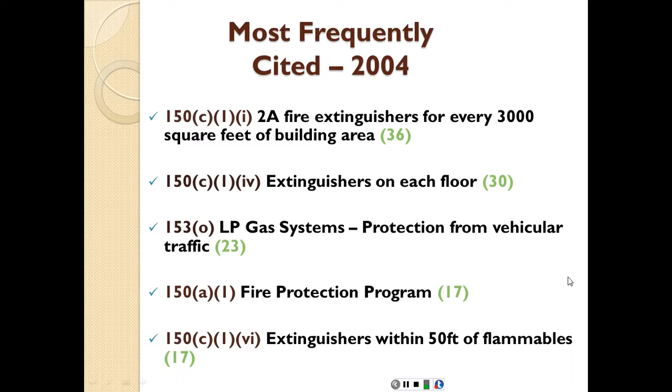Let's first of all identify a few things. The first definition is about what is flammable. Flammable is any material capable of being easily ignited, burning intensely, or having a rapid rate of flame spread. Flammable liquids are liquids having a flash point, which is the point of ignition, below 140 degrees Fahrenheit and a vapor pressure not exceeding 40 pounds per square inch. So these are the flammable liquids.

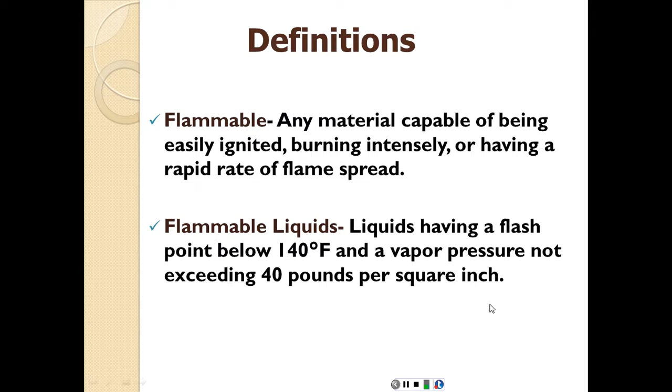Another definition is a safety can, because we're going to talk about storage in safety cans. So what's a safety can? It's an approved closed container of not more than 5-gallon capacity, having a flash arresting screen, spring closing lid, and spout cover designed so it will safely relieve internal pressure when exposed to fire. Because if the pressure keeps building inside, it's going to explode.

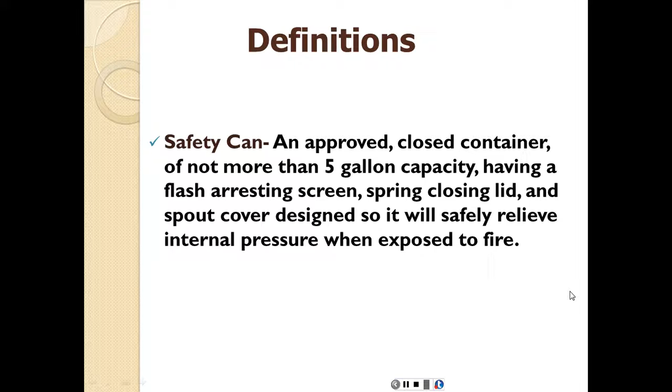These are samples of these safety cans. As you can see, it's labeled as a safety can, and the liquid inside is a flammable liquid. This one here is a regular gas, and so on. So they are going to be labeled on the outside as well. That's another example of a safety can.

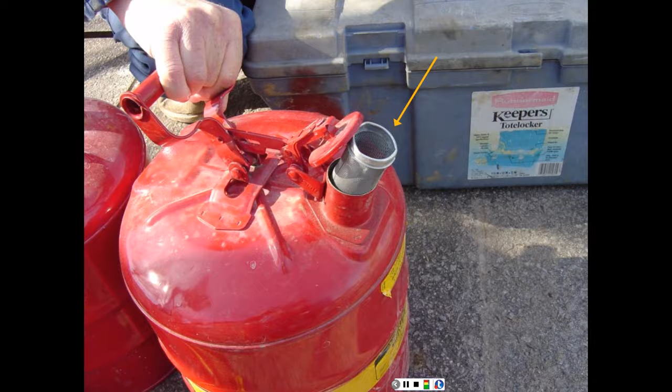General requirements when it comes to fire protection: the employer must develop a fire protection program to be followed through construction and provide all equipment as required for firefighting. We're going to talk about the different kinds of equipment that are going to be used in case of building under construction or a permanent construction or whatever.

Water supply, a temporary, of course, as we know, the easiest way to put out fires is using water. So a temporary or permanent water supply of sufficient volume, duration, and pressure must be made available as soon as combustible materials accumulate. Where underground water mains are to be provided, they must be installed and available as soon as

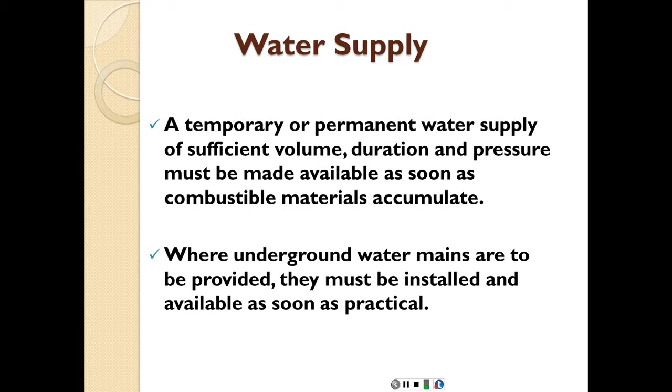Water supply standpipes: in all structures where standpipes are required, they must be maintained as construction progresses in such a manner that they are always ready for fire protection use. So these are going to be dedicated for fire protection. Standpipes must be provided with a Siamese fire department connection on the outside of the structure at the street level and conspicuously marked.

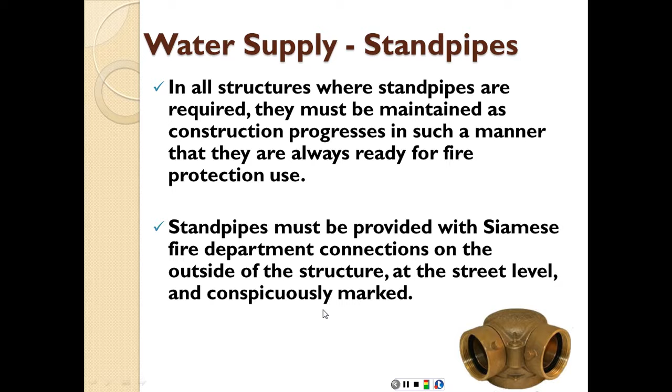Fire cutoffs. Now, in case of a fire, we want to limit the spread of that fire basically until we get some external support or someone calls the fire department and things like that. So when talking about walls and doors that are going to contain that fire, fire walls and exit stairways must be given construction priority. So you're going to have fire rated drywall, for example, or fire rated masonry walls or block walls, things like that.

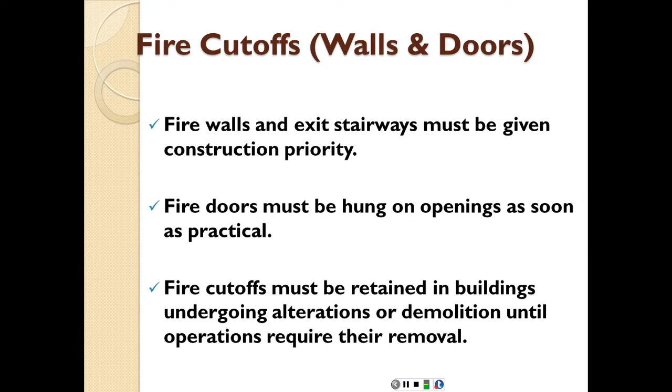Fire doors must be hung on openings as soon as practical, again, to isolate that fire and keep it contained within that room. Fire cutoffs must be retained in buildings undergoing alterations or demolition until operations require their removal. These include things like sprinklers, for example. If you're going to demolish a building or you're going to alter the internal use of the building, you should keep the sprinklers until the last possible moment so that in case a fire erupts, at least you're going to have the means to put it off.

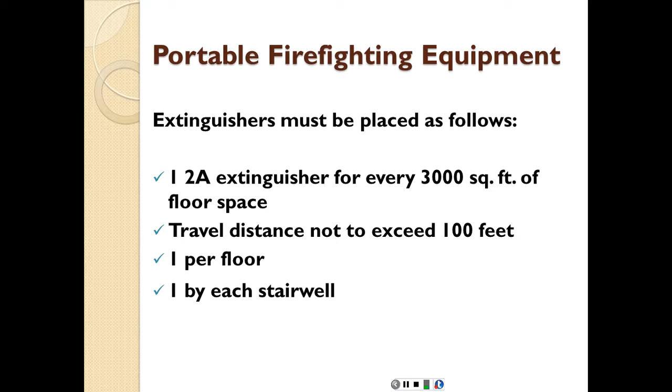Portable firefighting equipment are usually extinguishers, which must be placed as follows: 1 2A extinguisher for every 3,000 square feet of floor space. Travel distance not to exceed 100 feet, so that anyone trying to reach that fire extinguisher from any point on the floor won't travel more than 100 feet. At least one per floor and one by each stairwell. So these are the requirements for the portable extinguishers.

The alternative to a 2A extinguisher is a 55-gallon drum of water with 2 fire pails. Or a half-inch garden hose not longer than 100 feet, because otherwise it can get tangled and get knots, with a nozzle capable of discharging 5 gallons per minute, allowing for a quick discharge of water. The hoses must be located on racks or reels, again to prevent puncture to the hoses, disconnection, or tangling and knotting.

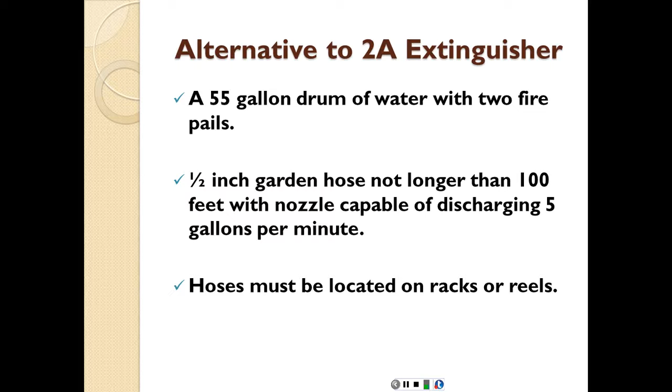Another portable firefighting equipment would be a 10B extinguisher, which must be within 50 feet of 5 gallons of flammable liquid or gas. We're going to talk about the A and the B classifications in just a couple of minutes. So a 10B extinguisher, suitable for flammable liquids or gases, has to be placed within 50 feet of any 5-gallon containers.

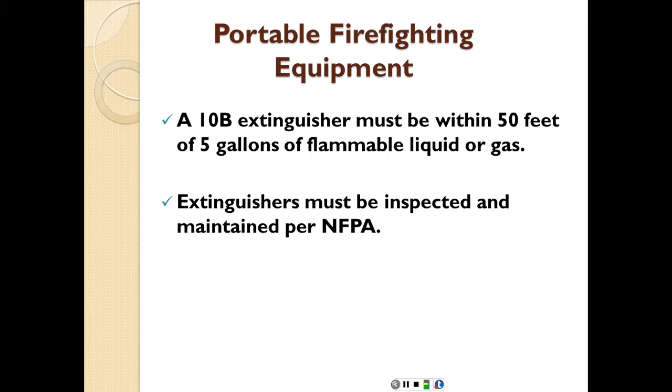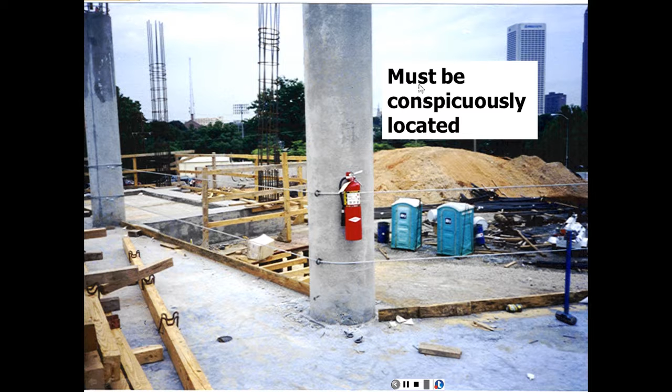It must be conspicuously located, so again you can clearly see it on site, and easily accessible on any floor, as we mentioned before.

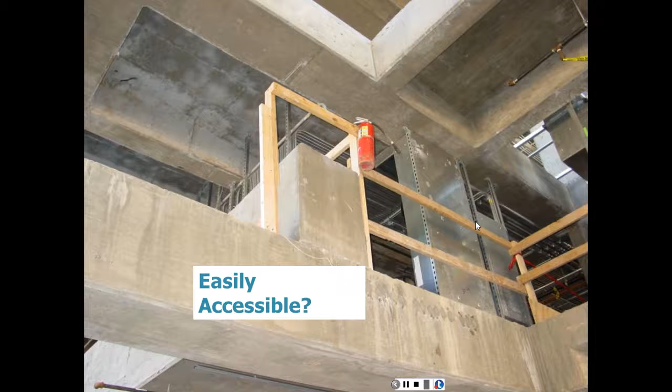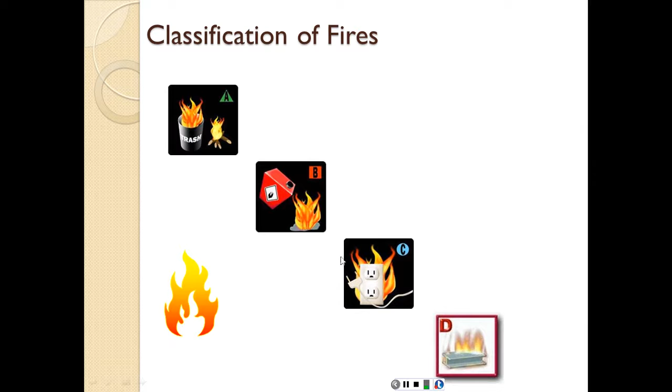Now to talk about the different types of fire, we have 4 different categories or groups: A, B, C, and D. The higher the letter, the more serious and hotter the fire. So type A is lower than B, B is lower than C, C is lower than D, D is the highest. Classification A is for wood, paper, or trash, which is most common but can be easily extinguished. Its burning temperature is not that high.

B is for flammable liquids. That's why we mentioned having it near the 5-gallon containers, within less than 50 feet. C is electrical equipment, burning at a higher temperature. D is combustible metals, which has the highest temperature, lasts the longest, and is the hardest to extinguish.

As you can notice, each one of them, in addition to the letter, has a certain symbol. The A is in a triangle, the B is in a square, the C is in a circle, and the D is in a star.

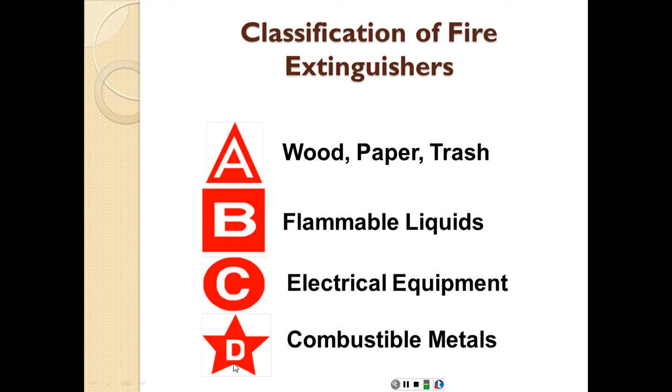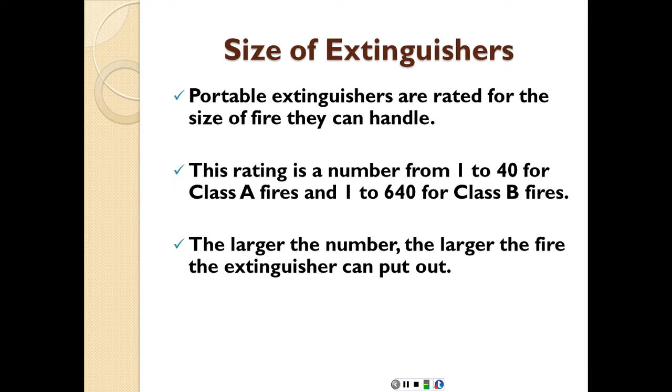The sizing of the extinguishers: portable extinguishers are rated for the size of fire they can handle. This rating is a number from 1 to 40 for Class A fires and 1 to 640 for Class B fires. The larger the number, the larger the fire the extinguisher can put out, so the higher, the stronger that extinguisher.

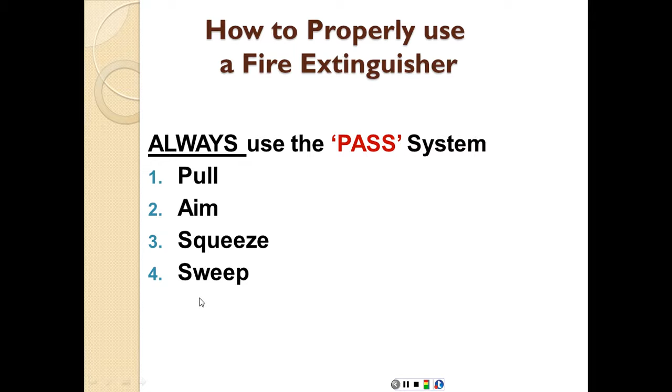How to properly use a fire extinguisher? Always use the PASS system. Remember PASS: P is pull, A is aim, S is squeeze, and S is sweep across the base of the fire to extinguish it.

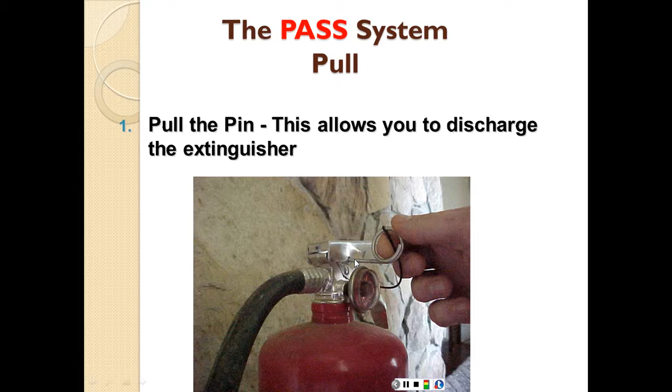The first step is to pull the pin. This allows you to discharge the extinguisher. That pin is a safety measure just so that it wouldn't discharge by accident.

Aim the extinguisher at the base of the fire. Aiming at the flames will not put out the fire, but the base of the fire is where the ignition is.

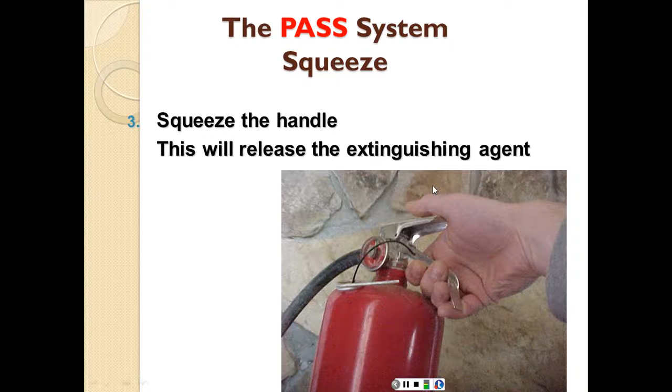Squeeze the handle. This will release the extinguishing agent, whether it's powder, foam, or water. And sweep from side to side with the extinguishing agent until the fire is out, covering across the base of that fire.

During demolition or alteration, sprinklers must be retained in service as long as reasonable. New construction utilizing automatic sprinklers must follow the work and be placed in service as soon as practical. So they're basically the last out, the first in. Once you are dismantling, altering, or demolishing, they stay for as long as possible, and when you are building anew, then they're installed as soon as possible.

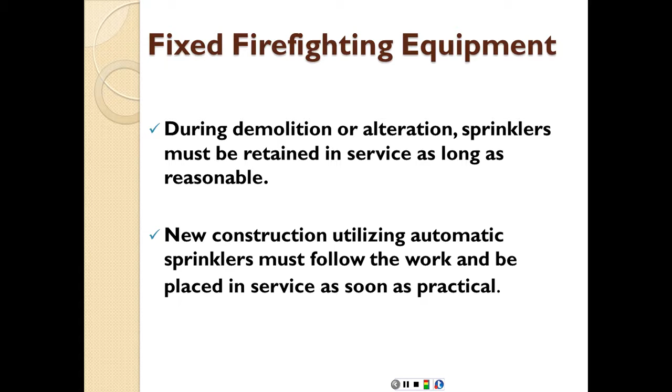Alarm devices: an alarm system must be established by the employer that alerts employees and the fire department. The alarm system can be phone, siren, radio, air horns, etc. It must be posted at phones and job entrances so people would know where that alarm system is, so that they can notify everyone as soon as the fire erupts.

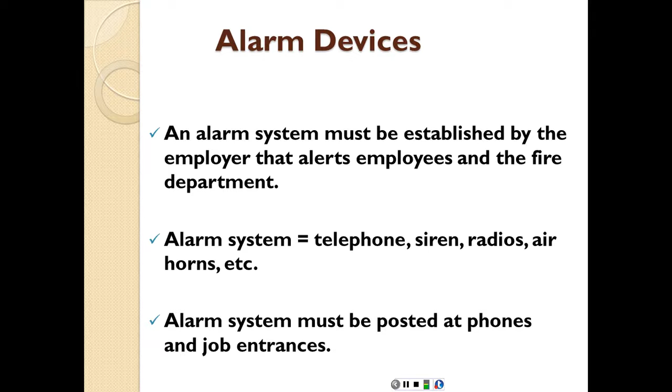Electrical wiring and equipment: when we talked about electrical work, we mentioned that fire is going to be one of the major hazards. So electrical wiring and equipment for light, heat, and power must be installed per Subpart K, which is electrical. Gas-powered equipment must point exhaust away from combustible material so that the heat from that exhaust might not cause ignition to that material. Smoking must be prohibited in work areas which may pose a fire hazard.

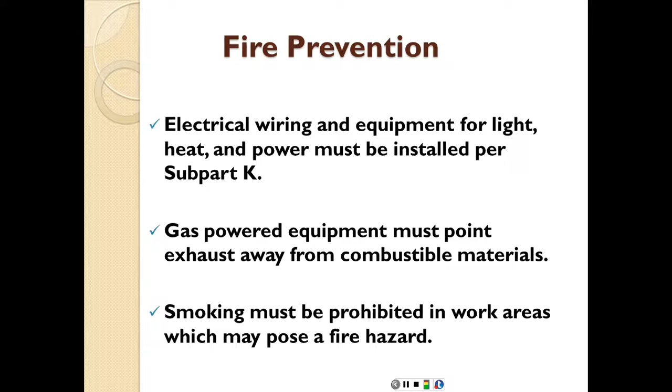No temporary building may be erected where it would block or hinder an exit, because in case of a fire, you want to have a safe exit for those who are inside the building. Temporary buildings must be erected at least 10 feet from other structures, again to allow for enough space for people to get out of the building in case of panic.

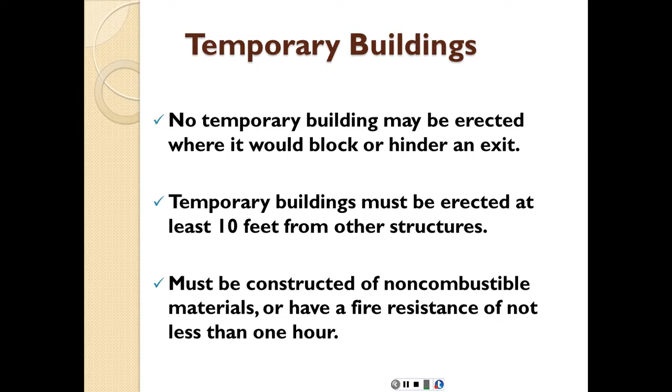It must be constructed of non-combustible materials or have a fire resistance of not less than 1 hour. So it can resist - in case it gets on fire - before collapsing, it's going to resist the spread of that fire for at least an hour.

In case of open yard storage, combustibles must not be stacked more than 20 feet high. So if you have any combustible material that you're going to stack on site in open yard storage, not higher than 20 feet. Storage area must be kept clear of weeds, trash, or any other combustibles that can ignite or help with the ignition, so you want to avoid that.

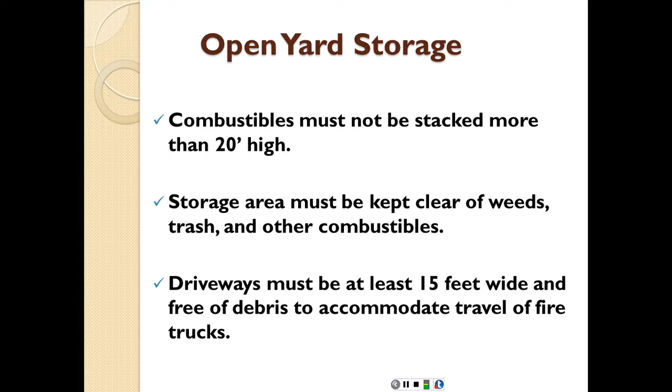Driveways must be at least 15 feet wide and free of debris to accommodate travel of fire trucks, because fire trucks are much wider than regular vehicles, so you want to allow for at least 15 feet wide access.

Entire storage site must be kept free of accumulation of unnecessary combustible materials to try to limit the occurrence of fire as much as possible.

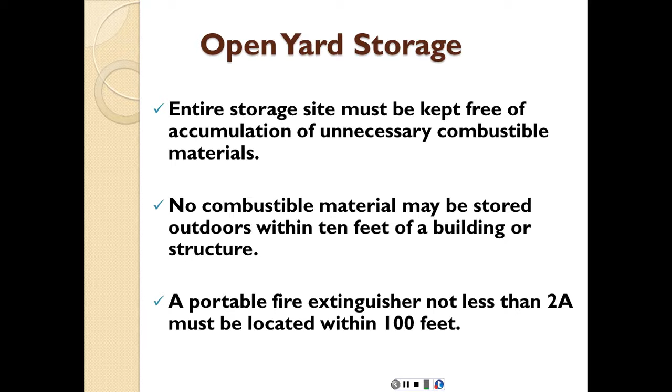No combustible material may be stored outdoors within 10 feet of a building or structure, because in case people are trying to get out of the building, they do not need to be exposed to an additional hazard of fire facing them. A portable fire extinguisher not less than 2A must be located within 100 feet. So that's in case of open yard storage.

For indoor storage, all materials must be stored, handled, and piled with due regard to their fire characteristics. Incompatible materials which may create a fire hazard must be segregated by a barrier with a fire resistance of at least 1 hour. So the minimum fire resistance in this case to enclose the fire is going to be at least 1 hour.

Clearance of at least 36 inches must be maintained between stored materials and sprinkler deflectors, again to allow for the sprinklers to work properly and to spread to the required area.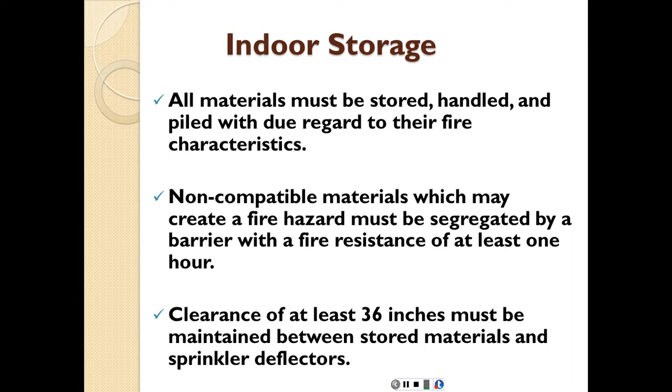Maintain clearance around lights and heating units to prevent ignition of combustibles. So do not store the combustible material too close to a source of heat or a source of fire where it can cause that ignition.

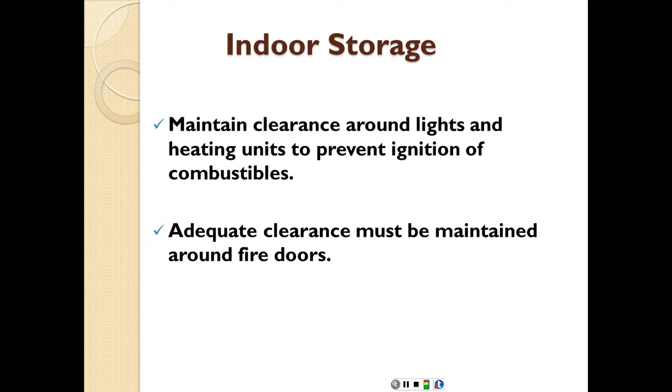Adequate clearance must be maintained around fire doors, again because the fire doors are going to be used to enclose the fire. In case someone is inside, they need to get out, so you need to have easy and free access in and out of that room.

For flammable and combustible liquids, only approved containers and tanks, which are portable tanks that we're talking about, are to be used. It cannot be stored at exits, stairs, or passageways, because that defeats the purpose of an exit point in case of a fire. These by themselves are a big fire hazard, so you want to eliminate them or keep them away from the exits and the doors and the stairs.

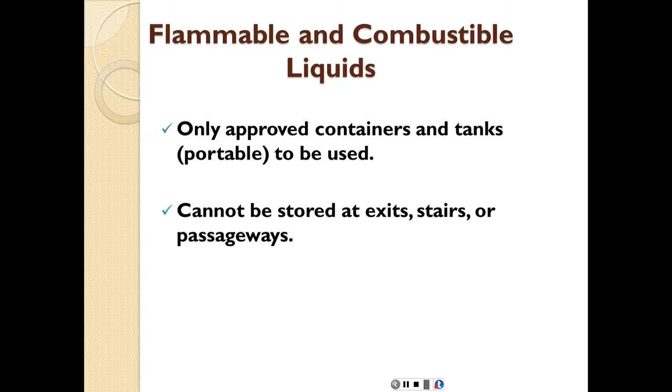For the storage of these flammable and combustible liquids, no more than 25 gallons of flammable or combustible liquids may be stored in a room outside of an approved storage cabinet. So you can have more than 25 gallons, but inside the storage cabinet.

No more than 60 gallons of flammable or 120 gallons of combustible liquids can be stored in any one storage cabinet. So even if you're going to have a storage cabinet to contain this combustible or flammable material, it should not contain more than 60 gallons of flammable or 120 of combustible.

Now, which one is easier to ignite, the flammable or the combustible? Obviously the flammable. That's why we have a lower limit.

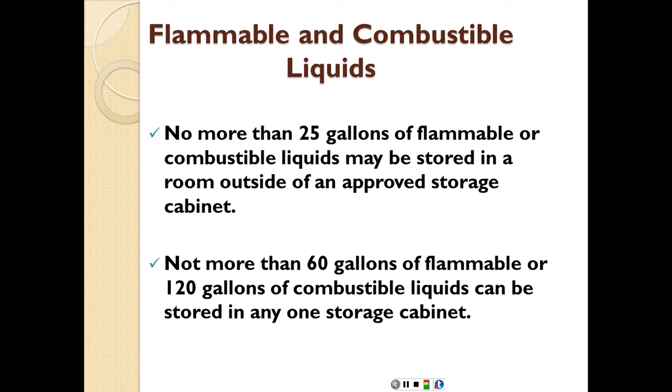No more than 1100 gallons may be stored in any one pile or area of combustible or flammable liquids. Piles must be separated by 5-foot clearance, again to allow for access between these piles to prevent the spread of that fire. Piles must not be closer than 20 feet to any building, again to allow for ease of a safety zone or access zone between the building and the storage area for these flammable and combustible liquids.

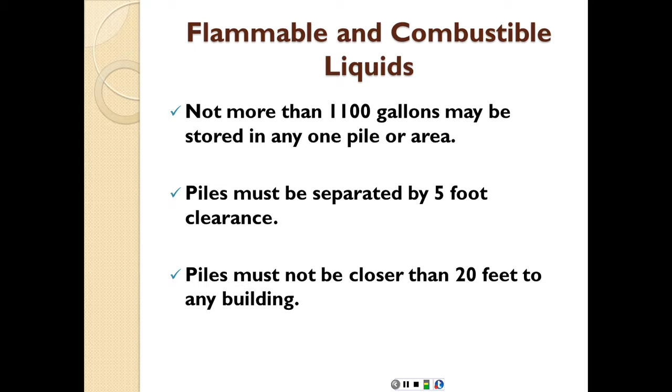Storage area must be guarded, must be graded to divert spills away from buildings or other exposures. So again, to allow for the natural flow of these liquids away from the building.

Or surrounded by a curb or earth dike at least 12 inches high, again to prevent the spread of the leakage of that combustible or flammable liquid.

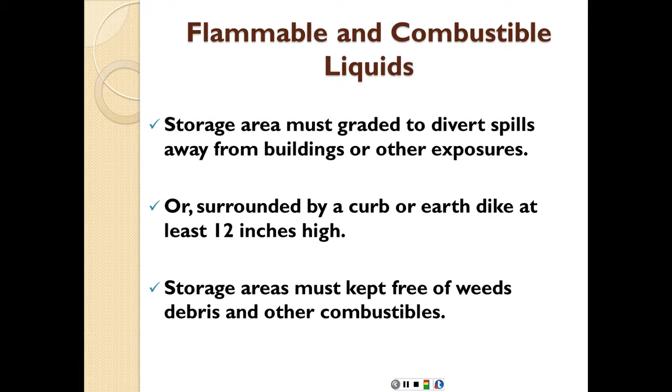Storage areas must be kept free of weeds, debris, and other combustibles that can help with the ignition.

Storage areas in buildings must have a 20B fire extinguisher, so grade B at least, outside the room but not more than 10 feet from the door, again for ease of access.

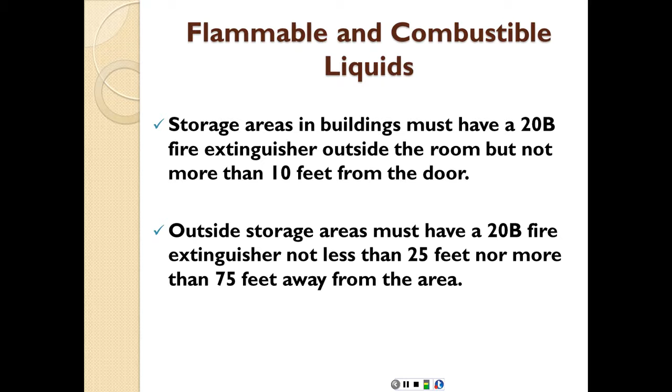Outside storage areas must have a 20B fire extinguisher not less than 25 feet nor more than 75 feet away from the area. You don't want to keep it too close, and you don't want to keep it too far away from the area as well.

When transferring liquids from one container to another, the containers must be electrically bonded to prevent any sparks that might allow for ignition. Equipment must be shut off during refueling.

So if you're going to fuel any piece of equipment, whether portable or a heavy piece of equipment, it must be shut off during that refueling.

Flammable liquids must only be used when at least 50 feet away from open flames and other sources of ignition. So if you're going to do that refueling, again, you have to be at least 50 feet away from an open flame or other source of ignition.

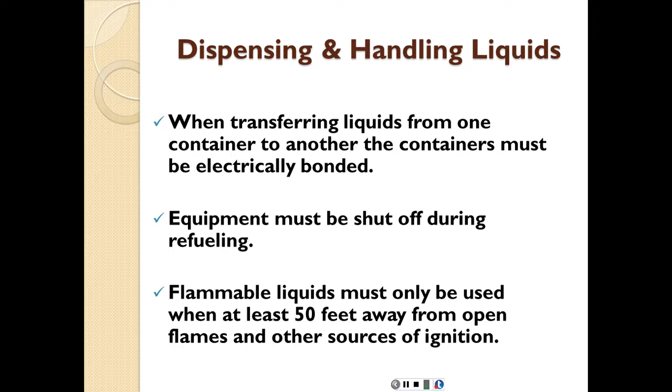Service and fueling areas must have at least a 20 BC extinguisher within 75 feet of the pump. So you're going to see that, for example, in gas stations.

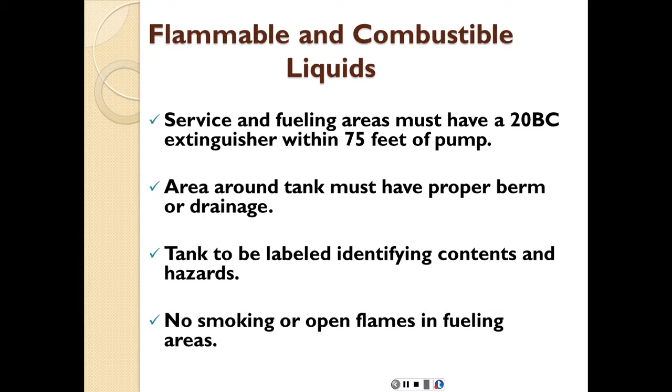Area around the tank must have proper berm or drainage to allow for the fluid to drain away from the equipment. Tank is to be labeled identifying contents and hazards. No smoking or open flames in fueling areas. These are all areas where there could be some violations that can cause fires.

Liquefied petroleum gas or LPG storage inside buildings is prohibited. So you cannot store it, you should not store it inside buildings because it can explode.

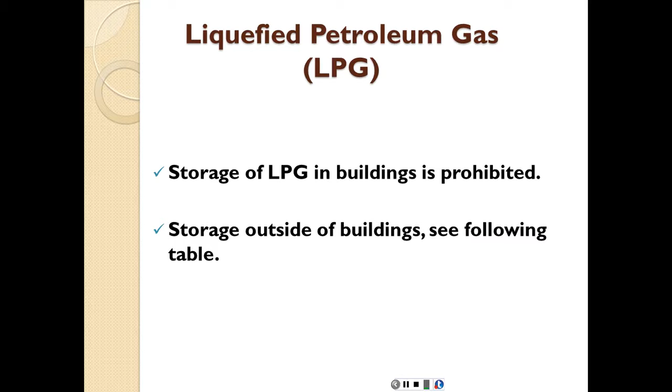Storage outside of buildings has to be done according to the following table. Here, depending on the quantity, how far from the building it should be. So if it's 500 pounds or less, it can be very close to the building, distance in feet, no distance.

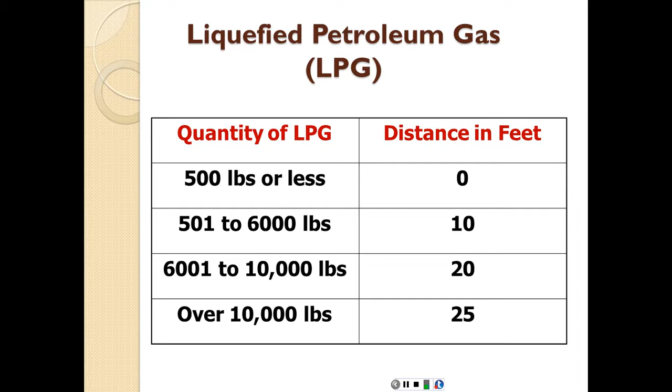501 to 6,000 pounds, at least 10 feet. 6,001 pounds to 10,000 pounds, at least 20 feet. And over 10,000 pounds, at least 25 feet away from the building.

For temporary heating devices, if we're working in cold weather, we need to create a nice work environment for the employees, so we're going to provide space heaters or heating devices. Fresh air must be supplied in adequate amounts to maintain the health and safety of employees, because many of these heating devices use gas or combustible fuels, and the fumes from these fuels may be toxic. So you want to have renewed fresh air in the area.

Flammable liquid fired heaters are to be equipped with a fuel shut-off control to stop fuel in the event of flame failure. If the flame is extinguished and the fuel keeps on being emitted, then that can cause a risk of asphyxiation.

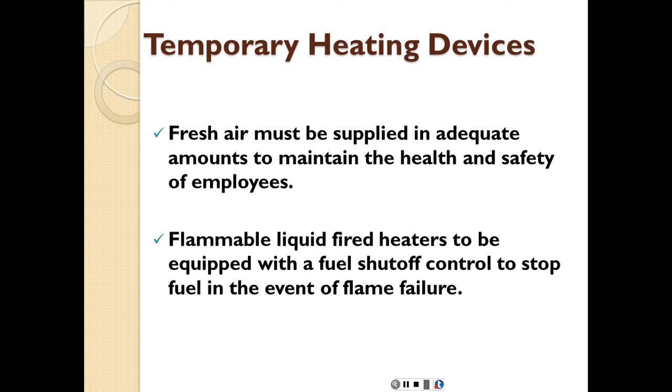When heaters are used in confined spaces, sufficient ventilation must be provided because of fumes and gases. If you're going to use solid fuel salamanders, they are prohibited in buildings and on scaffolds. This is an example of a solid fuel salamander, which is not allowed inside buildings or on scaffolds.

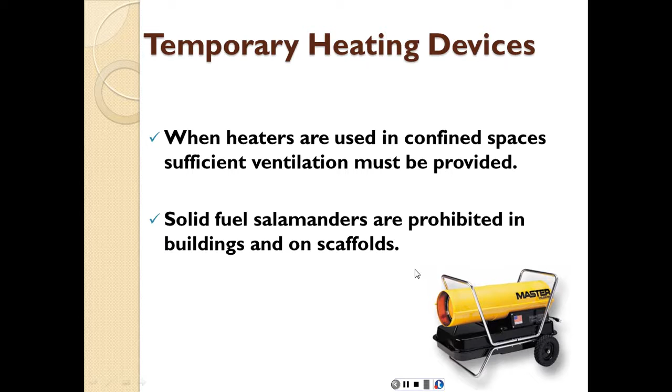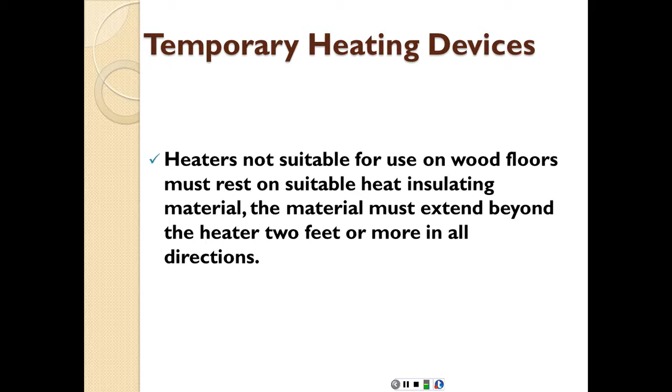Heaters not suitable for use on wood floors must rest on suitable heat insulating material. The material must extend beyond the heater 2 feet or more in all directions to create insulation between the heater and the wood floor, which is flammable by itself.

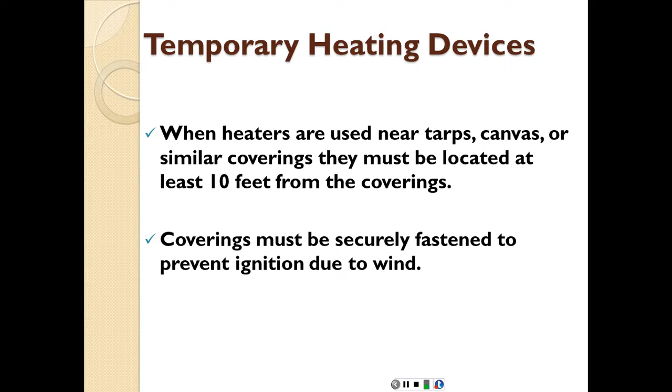When heaters are used near tarps, canvas, or similar coverings, they must be located at least 10 feet from the coverings, because all of these coverings can ignite, so you want to avoid that. Coverings must be securely fastened to prevent ignition due to wind, so that the flapping of the tarp or canvas can't get it closer than 10 feet.

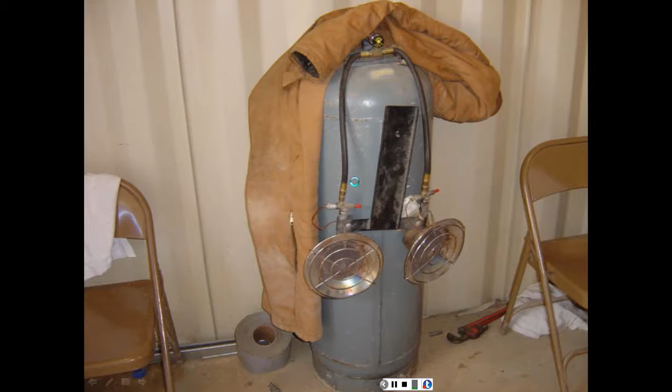If we look at this picture, we're going to find several violations. First, improper gas canisters - these are okay, but these ones are not. A heat source and so on, not properly stored, which is a big violation. Another violation here, we have a coverall stored on top of a gas tank.

So this is flammable. We have here curtains, or something like that, that probably could also be flammable. So that's not proper, and some other clothing here as well. So that's not the proper storage.

Welding fires - one of the most frequent causes of construction fires is the use of welding or cutting torches. The issue is there's going to be residual heat even after you're done welding; the metal itself might still be hot. It's imperative that sparks not be allowed to fall on combustible materials, since sparks are one source of ignition. Use fire retardant tarps or blankets when combustibles cannot be removed.

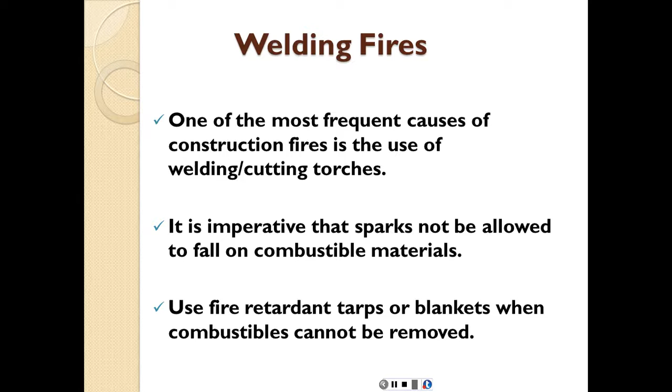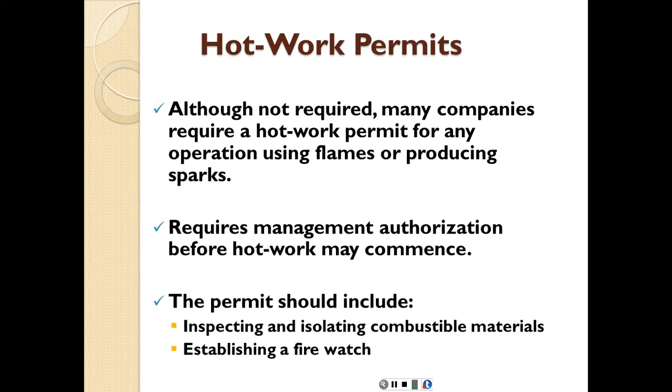Now we'll talk about a hot work permit, which is needed for certain kinds of work. Although not required, many companies require a hot work permit for any operation using flames or producing sparks. It requires management authorization before hot work may commence, and the permit should include inspecting and isolating combustible materials and establishing a fire watch, which we'll talk about next.

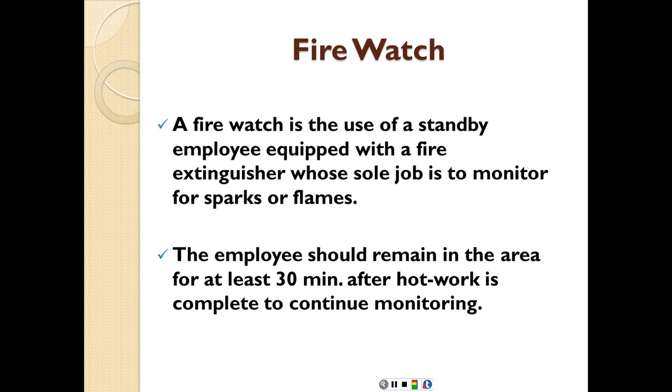Basically, a fire watch is the use of a standby employee equipped with a fire extinguisher whose sole job is to monitor for sparks or flames - they're not doing anything other than watching for flame spread or sparks. This employee should remain in the area for at least 30 minutes after hot work is complete to continue monitoring, especially in case of welding, since the metal itself is still going to be red hot even after you stop applying the welding material. So you keep watch for another 30 minutes just to make sure nothing touches that hot surface, causing it to ignite.

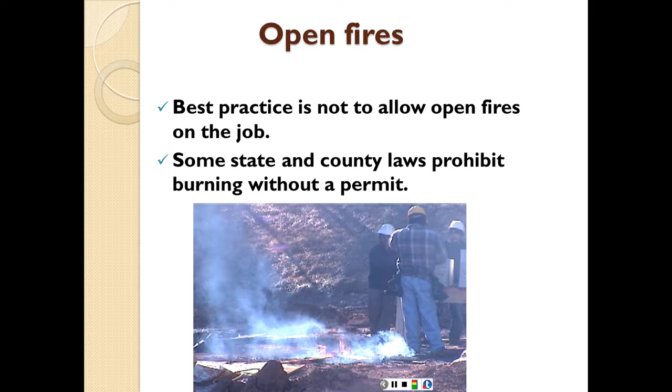For open fires, the best practice is not to allow open fires on the job. Some state and county laws prohibit burning without a permit, again to minimize the possibility of spreading fire.

So that's basically our presentation about fire protection devices, their availability, and so on. Here are some questions that we need to know the answers to.

What are the 4 steps used in using a fire extinguisher? Remember the acronym PASS, P-A-S-S. P is pull, and then remove the pin. A is aim. S is squeeze, and the other S is sweep across the base of the flame.

What type of fires does a BC extinguisher protect against? It's a BC, so it protects against B and C - in this case electrical and fuel. Fuel is B and electrical is C.

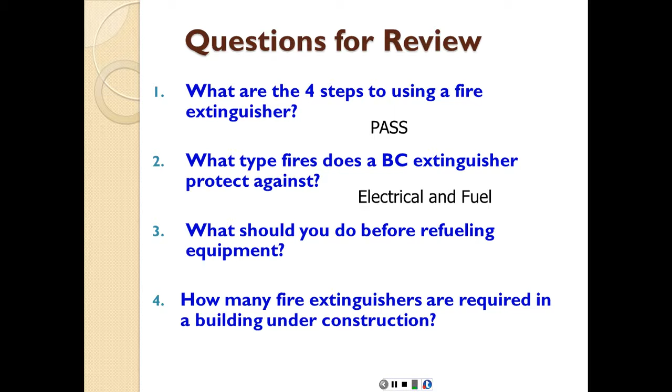What should you do before refueling equipment? If you're going to refuel equipment for use on a construction site, what should you do before that? Of course, it's going to be shutting off that equipment.

How many fire extinguishers are required in a building under construction? We talked about different methods of calculation. One of them is every 3,000 square feet, or at least 1 per floor, and the access should not be more than 100 feet in any direction for you to be able to access that fire extinguisher.

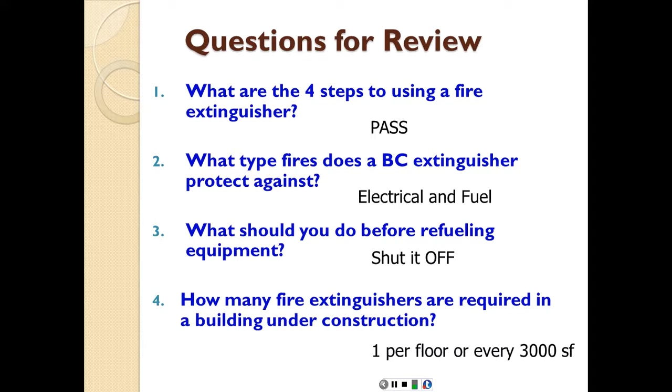So this is our presentation today about fire safety. I hope you have understood the material, and please stay safe. Thank you.